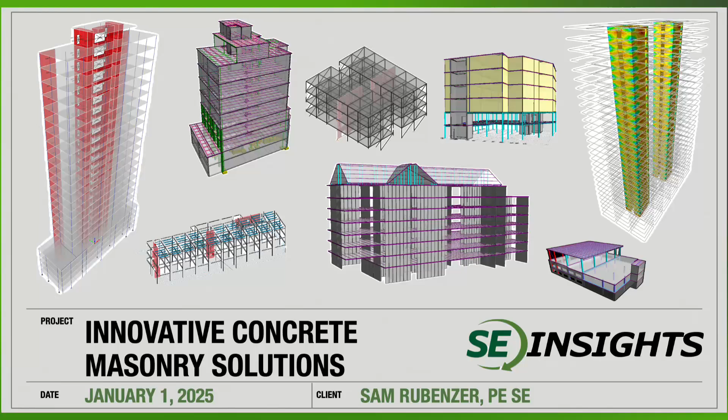Hello. In this session, we're going to discuss some innovative concrete masonry solutions.

My name is Sam Rubenzer. I'm the founder of FORSE Consulting and the managing director. I'm a licensed structural engineer in the state of Illinois and a professional engineer in a lot of Midwestern states. I have my engineering degree from the University of Minnesota and an MBA from Marquette University. Here at FORSE, we're a team of engineers with a lot of different masonry design experiences through delegated design, direct design, and we've been consultants to the masonry industry for the last 15 years.

Talking about innovation, I think it's always really important to consider a quote like this. Learning and innovation go hand in hand. The arrogance of success is to think that what you did yesterday will be sufficient for tomorrow. So certainly everything that we're talking about today in terms of innovation, things that we are doing for masonry design, we need to keep moving, we need to keep progressing, certainly in masonry and all other areas of structural design as well. So this is just one step. Here in 2025, we're looking at some ways to be innovative with concrete masonry.

So some of the things that we're going to look at, prefabrication is certainly going to be very much a part of our discussion today, how you can prefabricate masonry to achieve some pretty challenging constructability issues, whether it be site issues or time frame issues or building on site versus building in a controlled environment. So prefabricating masonry either on or off site and how that can impact delivery.

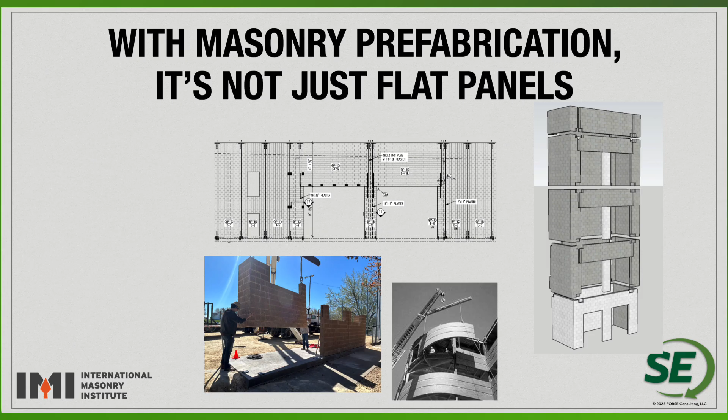And a lot of this prefabrication goes back to the image below, an actual exterior application, a prefabricated veneer panel that was built in the 80s and 90s. Vet-O-Vitz was a company that was around for quite a while doing some exterior masonry panels, but then shaft walls also, a complete four-sided shaft wall that we can also prefabricate.

So why do prefabrication? Obviously, prefabricated work can be protected from changeable weather conditions. Again, when we look at protection, that could be a tent on site, or it could be a warehouse type facility where we're doing some of the prefabricated masonry elements. So controlling weather conditions to make sure that you can always build with masonry is certainly really, really important.

Consider design features that might be too costly or labor intensive on site can be carried out in a factory. We have prefabricated elements that we're considering doing post-tensioning for. So post-tensioning might be a little bit different for the masonry industry, but it's something we're seeing implemented more and more, something that can be done in a factory setting. So you could do prefabricated masonry lintels or prefabricated elements and post-tensioned or pre-tensioned elements, depending on the different construction techniques.

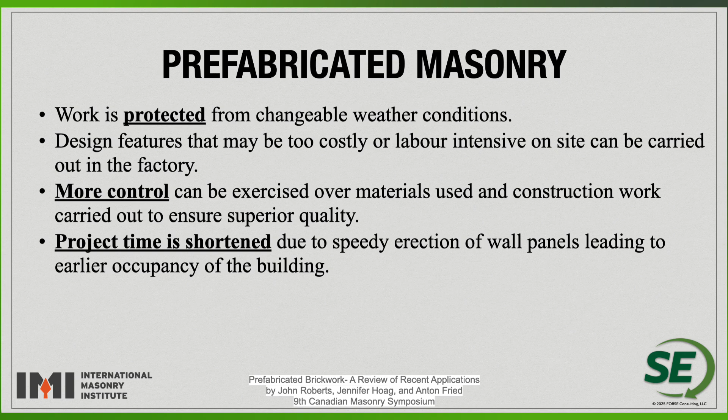More control can be exercised over materials and construction work to ensure a superior quality. You can really put it into a production style, having crews move to different stations within the controlled environment, again, a warehouse facility or something like that. And then the on-site time can certainly be shortened. So there's some huge cost savings when we can save on the overall construction time, and time on site is certainly very valuable. So a lot of the same reasons for prefabricating other materials are the same reasons we're going to consider for prefabricating concrete masonry elements.

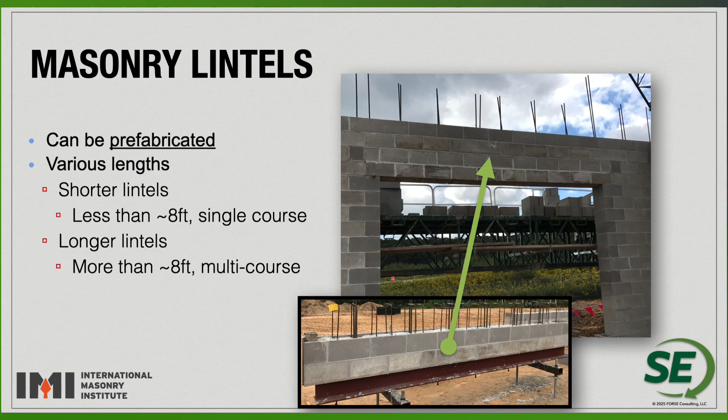So prefabricated masonry lintels, that's probably a really simple, easy place to start for prefabrication of masonry. Looking at some of the simple elements that you can construct, defining the area above an opening, a lintel element. You can prefabricate a portion of the lintel if you have enough reinforcement to shear connect additional courses to the design. But doing single course or multi-course lintels, just a quick guide, something around 8 feet we probably could do with single course. Longer lintels, maybe it's going to be multi-course prefabricated elements.

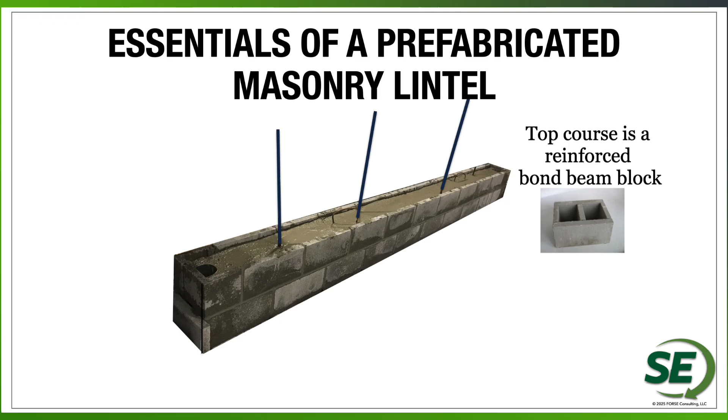Looking at some of the different components for a prefabricated masonry lintel, you're going to have the different types of block. We're going to have a bond beam block that maybe is going to be used at the top, or second course. You're going to have lintel blocks at the bottom. We're going to have vertical reinforcement that ties into the wall above. Now, sometimes we don't necessarily need to have the bars sticking out. Sometimes we can use a form saver dowel, something that the vertical reinforcement can be screwed into once we get on site. We have a lifting mechanism. Here's a lifting loop that goes around some of the reinforcement in the lintel.

And then lastly, here we have a void at the end. Depending on where the jamb reinforcement would be, putting the void at the end cell, or maybe even 12 or 16 inches in from the end, allows that jamb reinforcement to come up through the lintel so the built masonry conditions are still the same as if you would have built it on site. So having a very nice integral system, even with the prefabricated element.

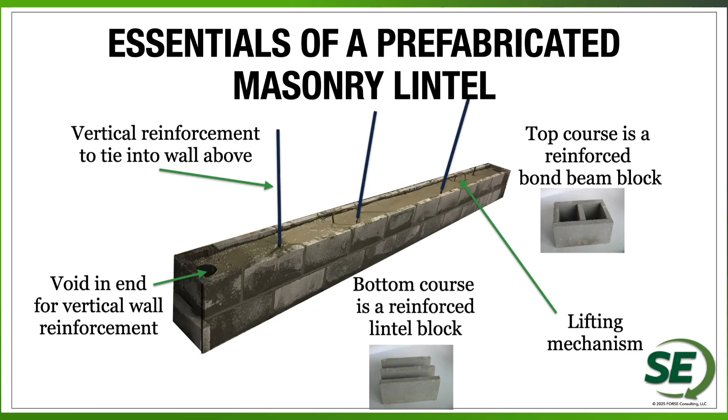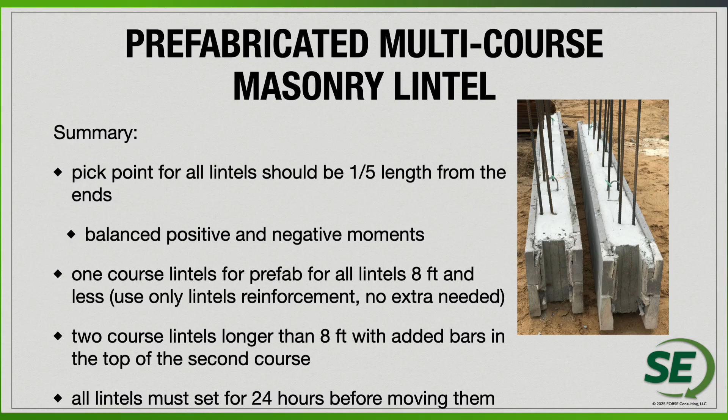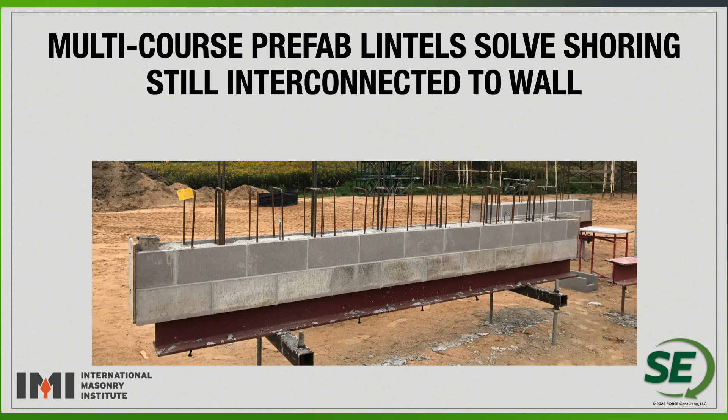But here you can see a project where I think there were over 70 prefabricated masonry lintels built on site. And then all of these were flown and set in place, all of it led by the contractor. The contractor was interested in saving time on site and ease of construction on scaffolding by just coming in and setting these things in place. A similar contractor had another project where they actually built a whole series of lintels.

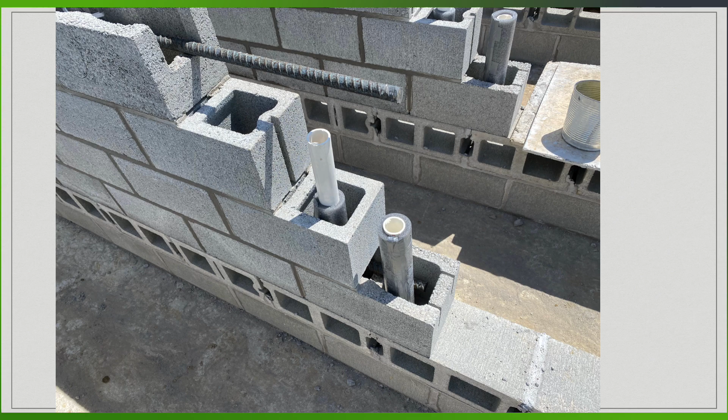Here they actually built the construction pad and used some other masonry materials to create a station system, so they could build many different prefabricated masonry lintels all at the same time. Here you can see some horizontal reinforcement at the top, but also some of the spaces and voids being incorporated into the end cells of the lintel for the jamb reinforcement to come through.

Next, we're going to take a look at prefabricated walls, prefabricated masonry wall elements.

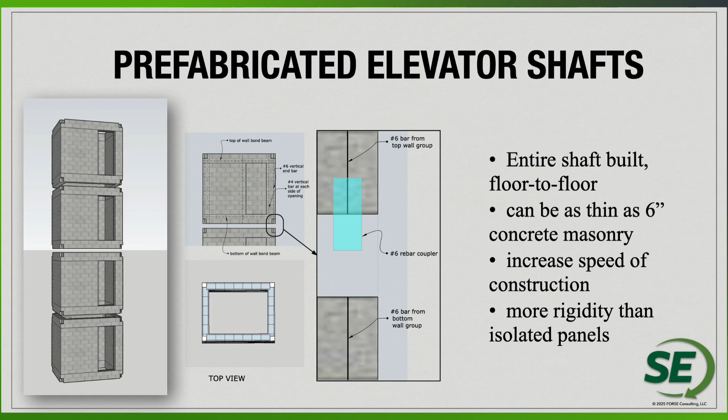There's a lot of different things that we can do with prefabricated masonry walls. There's a lot of different ways that they've been built, depending on the contractor, depending on the site and the conditions. Here you can see shaft walls that we considered and designed. We actually built in the ends, the corners of these shafts to have a reinforcement exposed with a coupler that was used to tie the reinforcement from one shaft wall to another.

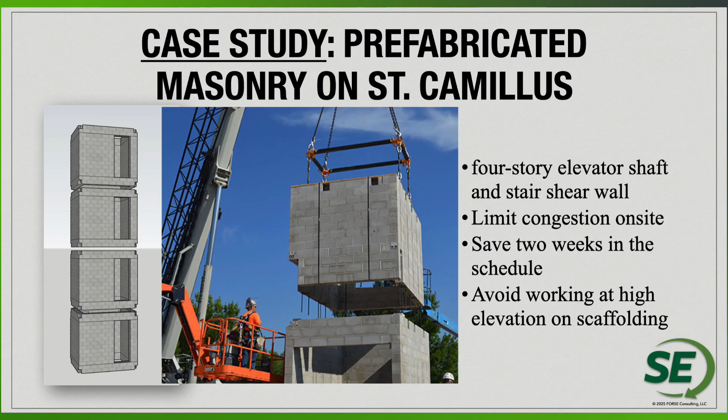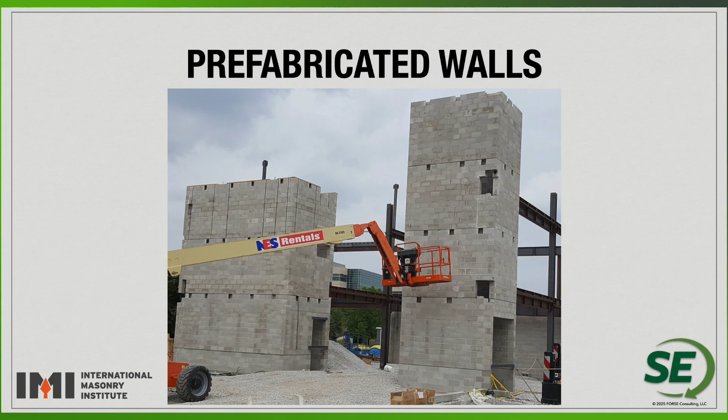So here you can kind of see that built on site and set on site for these shaft walls. You can see you also have openings at the ends of the walls. In this image, you can see some actual support locations for some of the load-bearing beams that are going to be sitting on these shaft walls. So they're load-bearing masonry elements that are prefabricated. So we have a lot of coordination that we had to consider and develop and build into the prefabrication of these elements.

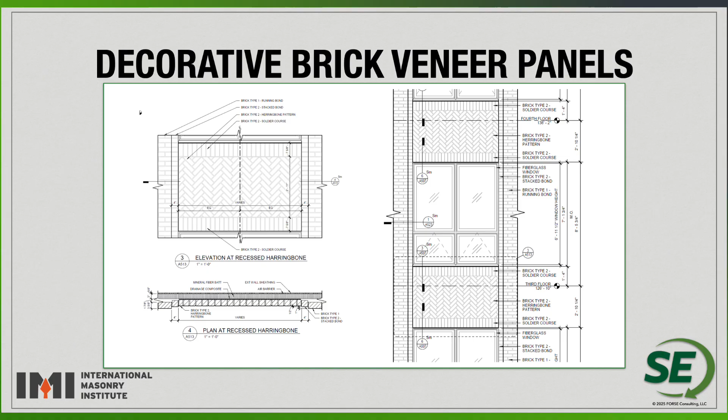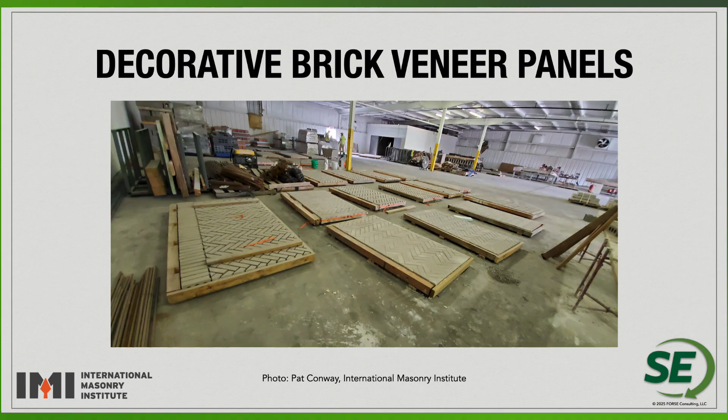You also have panels, veneer panels that you can build prefabricated. Here's an example of some brick ones, but you can certainly do this very same thing with concrete brick. So we can build these panels. You can build a whole system of these panels so that these panels can be built and set into place. A herringbone pattern might be something a little bit difficult to build on site. So you can build these elements in a shop environment, again, with a molding, setting the mortar, and then actually erecting them and maybe doing some field applied mortar as well.

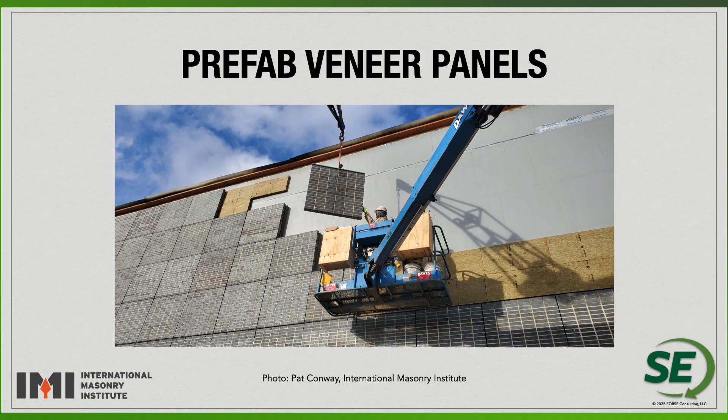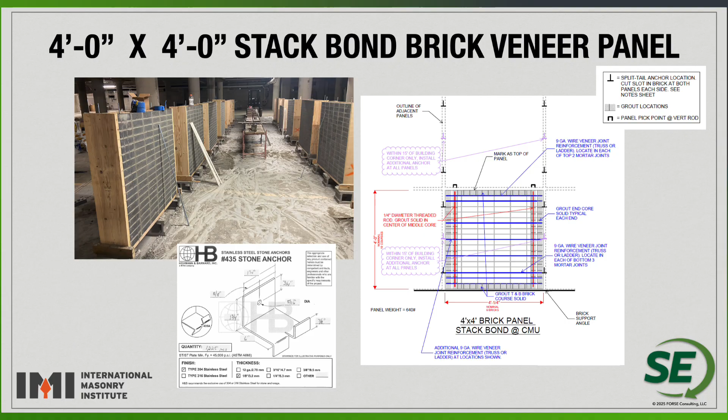So here you can see those elements. You can see more veneer panels that are being lifted and set on site. You can see there's different types of reinforcement that we can utilize, again, depending on the different types of conditions that you have for the elements actually lifting and setting some of these panels. We maybe have different types of reinforcement conditions depending on the size and location of where these panels might be set. So prefab veneer panels are certainly going to be important elements to consider.

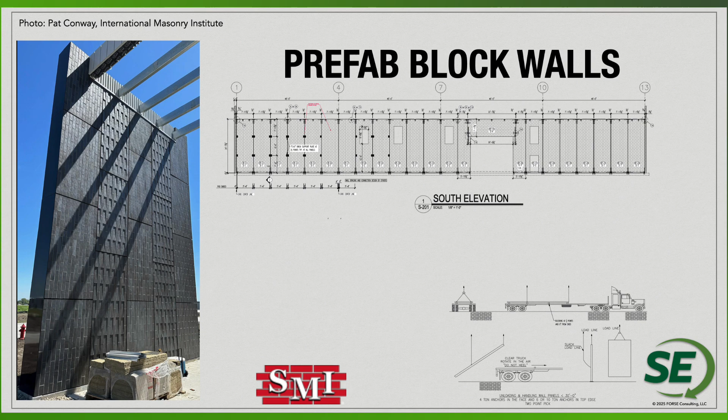Those prefab veneer panels can also be set on entire prefab block walls. So this is a project that we did for a company in Iowa, Seedorf Masonry, built these panels and set all of these concrete masonry panels for the entire building, the entire warehouse portion of the building, I should say, and then actually prefabricated the veneer panels to hang off the side of the concrete masonry block panels that were behind it. So again, prefabricated masonry was utilized in this project.

The time on site was really condensed by the fact of all the panels being pre-built actually an hour away. So they were shipped about 50 or 60 miles for this project. So they were built off-site, set in a field, and really set on trailer beds and then shipped down to the facility where they were erected here on site. So again, you could see some of the panel lines, so you could see how some of the different elements were erected and set in place.

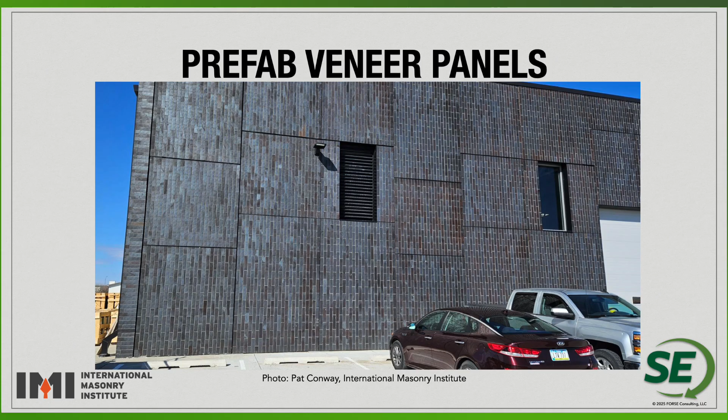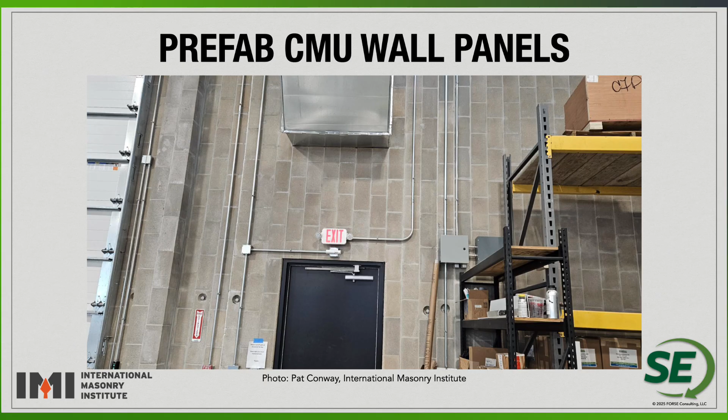You can actually see a little bit unique panels, bond patterns. You can see running bond running vertically for these panels, kind of a unique application that the facility wanted to show off. You actually see from the inside the concrete masonry block panels were also built with running bond going vertical. So the panels were actually built horizontally, reinforced in the horizontal setting, and then rotated, set on trailer beds, and then lifted and set here in place. So again, you could see here two different panels, one that was prefabricated on the right with the running bond going vertical, and then the site set panels on the left where you can see the running bond going horizontally.

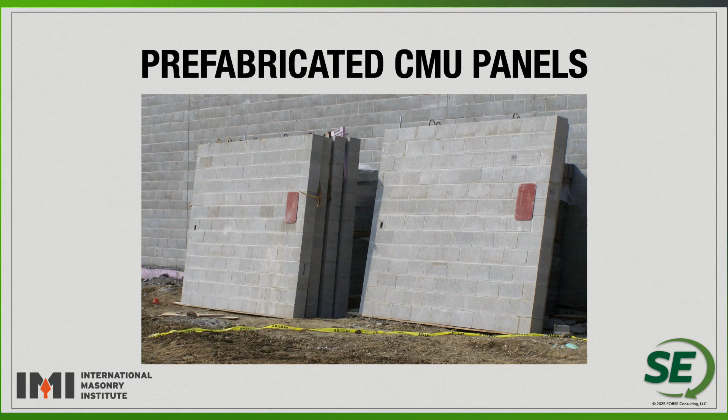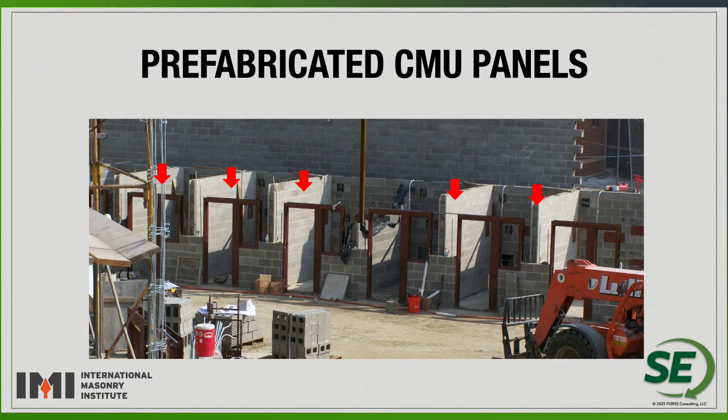So again, a lot of different options for prefabricating these masonry panels. Sometimes you just have a lot of repetitive panels. These are prefabricated concrete masonry panels that were used for a correctional facility. So again, it wasn't really so much about a very difficult design. This is just a very repetitive design, something that they could prefabricate a whole bunch of. So again, they could speed up the time on site for the construction of these cell areas.

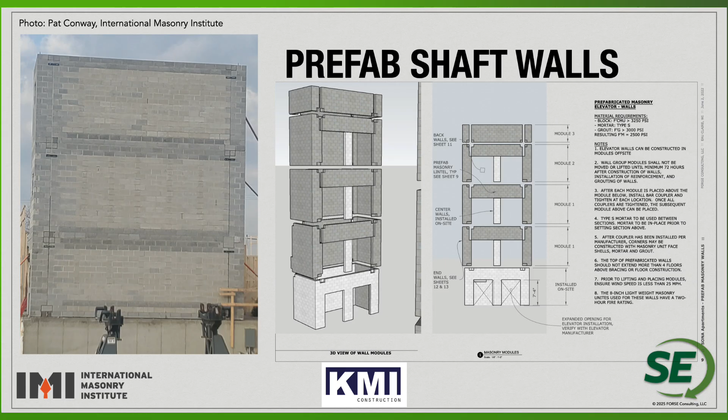You can see in the images on screen, all of the gray elements are going to be the ones that are prefabricated. All of the white elements were actually built on site, just due to different conditions of the prefabrication. We wanted to build everything above grade, so everything in the basement and the white was built on site. Once we got the precast planks set, we could go with the precast floors and then the prefabricated shaft walls above.

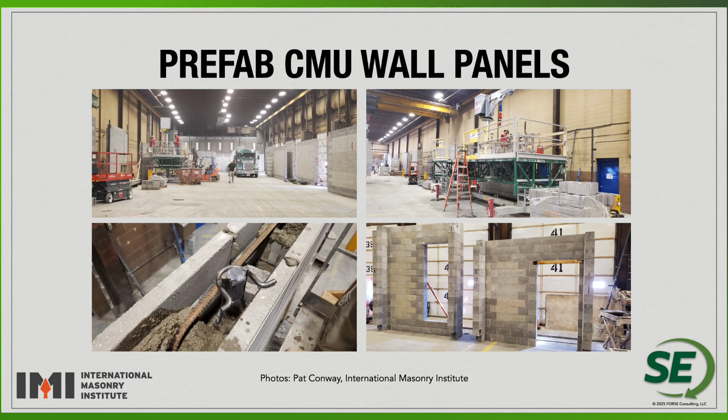So you can see a few different images here of them actually constructing them in a warehouse facility. All the different reinforcement connectors that are being used for these prefabricated elements. More shaft walls being lifted and set in place. You can see the corners.

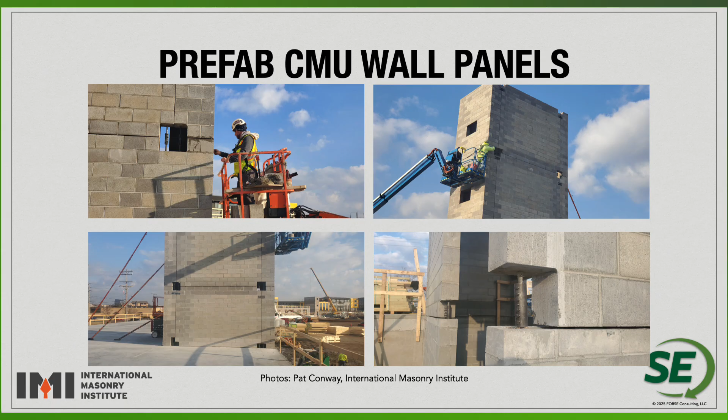If you look really close at the image on the upper left, you can see actually one of the couplers being used to splice the reinforcement from one panel down to the panel below. And a few images a little bit further away from the shaft walls. Quick thank you out to Pat Conway for some great images here for these panels built, again, on site.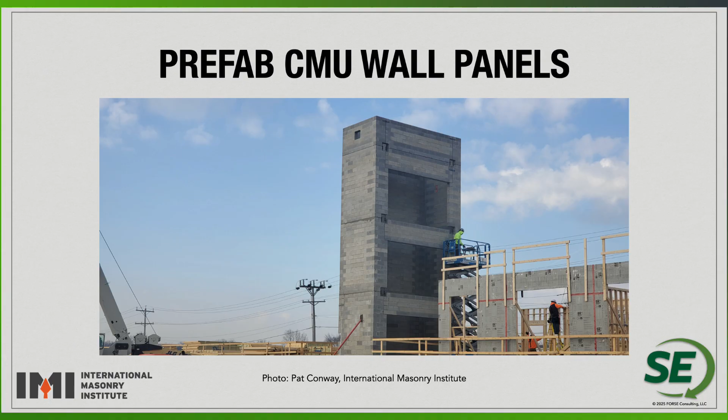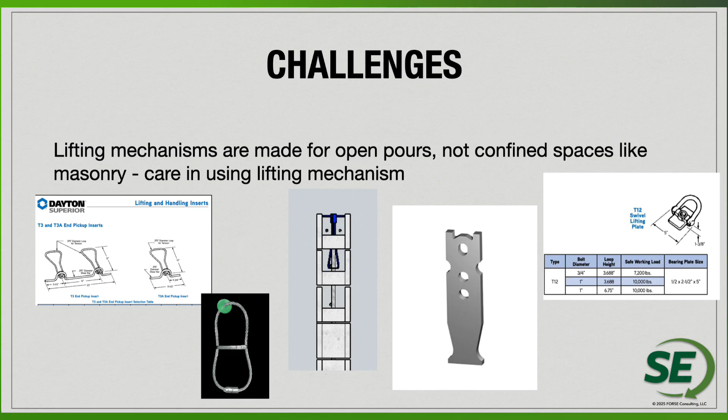So some of the challenges with prefabricated masonry: using some of the different lifting mechanisms, we had to make some modifications, for a lot of these mechanisms are built for and designed for precast concrete elements. So again, it's a little bit different challenges when you have setting these connecting mechanisms within a confined cell. So we had to overcome some of those challenges when we wanted to develop some of the different connection points for these different prefabricated masonry items.

Some of the key points for masonry fabrication, obviously the essentials of masonry. We have to make sure that we understand the capacity of masonry, making sure that we understand the purposes to simplify and speed up. We don't want to reduce the overall capacity. When we prefabricate, we certainly want to build in plenty of strength in the overall design. We have a lot of different avenues for prefabrication. We can do entire shaft walls, we can do wall panels, and we can do lintels, or we can do some combination of all of the above.

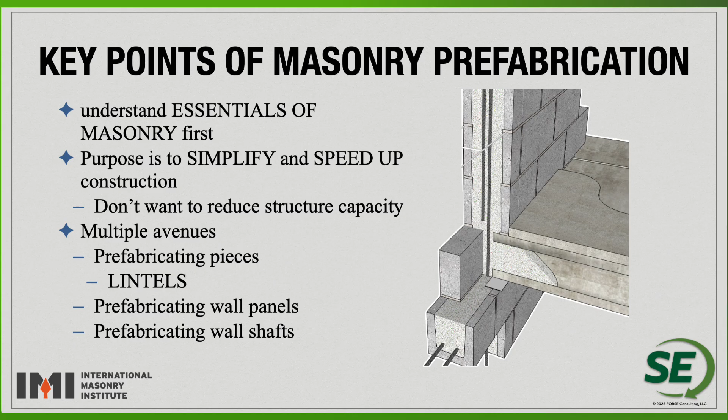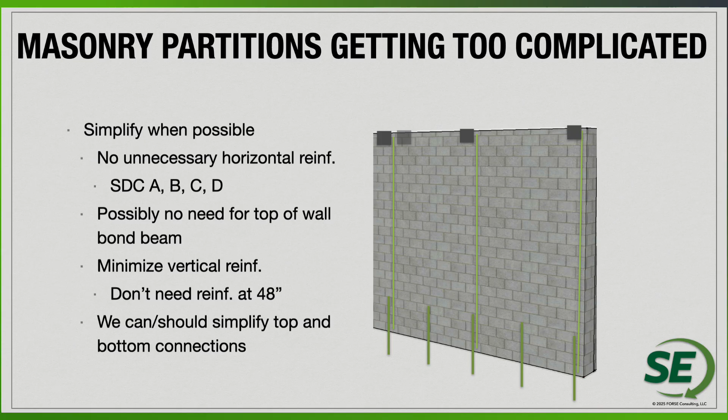Next section here, we're going to look really quick at some of the other innovations. Again, the partition walls, really the simplification of them is what I'm going to call the innovation, pulling out some of the reinforcement, simplifying some of the connections for these walls to try to, again, bring down the cost, bring down the elements that you need in place, considering thinner walls or unreinforced and ungrouted partition walls to save a lot of materials in design.

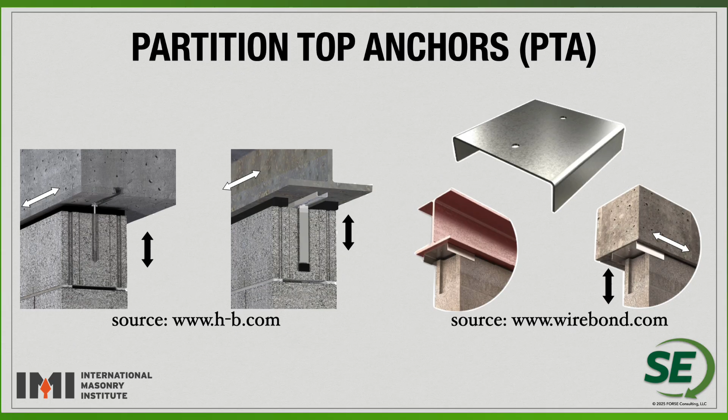Some of the different top of wall anchors, these are relatively new. We see people using these in a mixed kind of capacity. Sometimes we are able to design some of these for different mason contractors. Sometimes engineers like to use something that's much more expensive and a lot more elaborate at the top. But again, partition walls, we have really light loads. We really just need to consider the minimal connections that you need at the top and at the base to keep these elements efficient. So that goes for the interior walls, but also exterior walls.

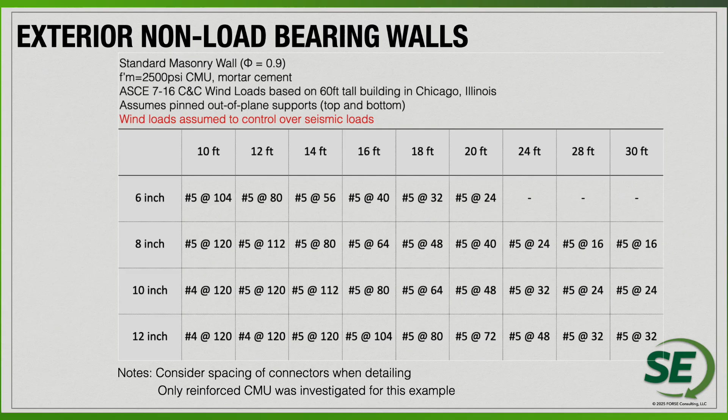Again, if we can pull out some of the reinforcement, we can simplify some of the connections. We really can save a lot for some of these exterior non-load bearing walls. So sometimes these are used obviously for architectural reasons, but having a chart like this so that you can reinforce them in a minimal fashion, and then consider some of the similar connections at the top.

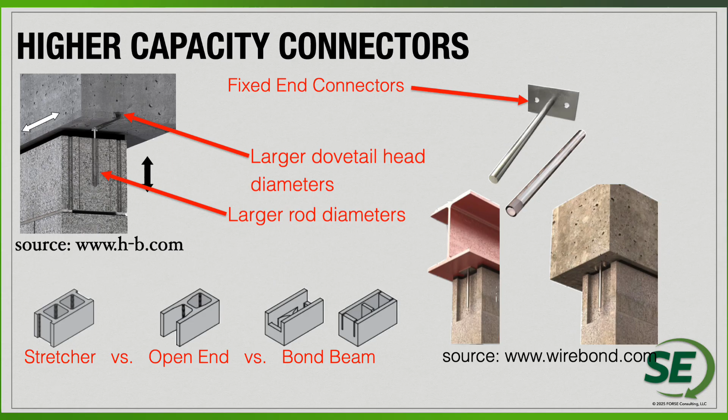Again, we're getting some requests for doing similar types of connections at the exterior walls. And again, they're going to have higher load demand. So we're going to have larger rod diameters, larger connectors, larger plates that are going to need to be used. But again, a lot of this information we can put into a little guide for partition walls. And then we have also one for exterior walls that people can download.

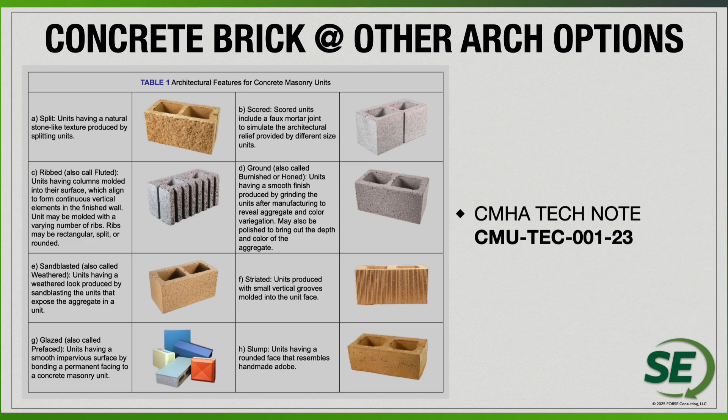Now, doing that on a full unit or looking at a concrete brick. So concrete brick is really going to give us options for doing concrete elements from 4 inches to 12 inches wide. The 4-inch element could be unreinforced, kind of in a cavity wall construction. But once you go to 6, 8, 10s, and 12s, obviously we can do reinforcement.

So you can have concrete brick in a single width wall application, but we also could use concrete brick in a cavity wall, especially again if it's 4-inch. A 4-inch concrete brick utilized in a cavity wall could be used very similar to the clay option.

You also have a composite wall, which is essentially you could have 2 reinforced walls that would be connected by a collar joint. And so a composite wall would really be just kind of an overall thicker wall by having a concrete brick option and a concrete backup wall.

Composite walls are not used when you have clay and concrete, but if you have concrete and concrete, certainly looking at a composite wall could use a thicker wall construction. You could use more aesthetic options on the outside and something different on the inside. But composite wall is going to end up being kind of something like the single width wall.

You also have a diaphragm wall. Diaphragm wall would be kind of 2 separate wythes that are built with some space in between. The diaphragm wall, the purpose of it would be to go kind of super tall with your design. You can connect the 2 wythes with what we would call diaphragm walls, connecting them together so the internal wythe and the external wythe would actually work together for the out of plane kind of bending capacity.

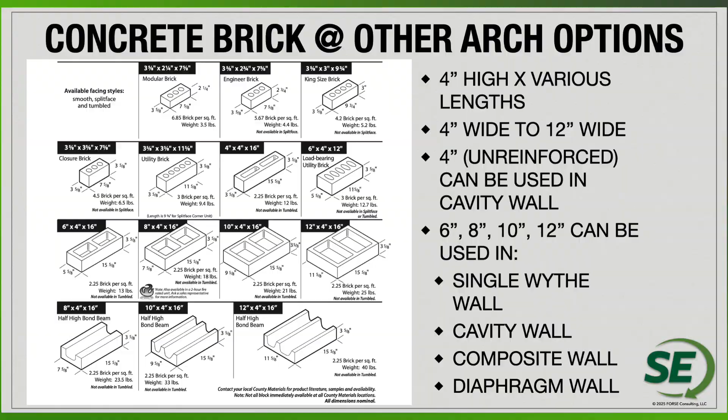So it's a really creative, great way to get a lot more capacity. But again, using concrete brick that can be reinforced on the outside and inside certainly gives you a lot more options. And again, anytime that we're going to do any conversations about prefabrication of a concrete brick application, we're going to have to use at least a 6-inch thick concrete brick to actually get to a design that can be reinforced so that we can lift and set into place.

All right, some other innovations beyond the concrete brick. If we looked at 32-inch block, Insultech, high R CMU, these are going to just be new products that are going to be available for use in concrete masonry design. So the first one I'm going to look at here is post-tension masonry. This is actually codified. It's not so much of a new idea. It's been around for quite a while.

It's been used in different parts of the country and a variety of different types of construction in full building designs. So post-tensioning, there's going to be some necessary products for anchorage at the top and bottom. So it's a little bit different construction when we look at the typical masonry wall design construction, but certainly there's a lot of potential with post-tensioned concrete masonry.

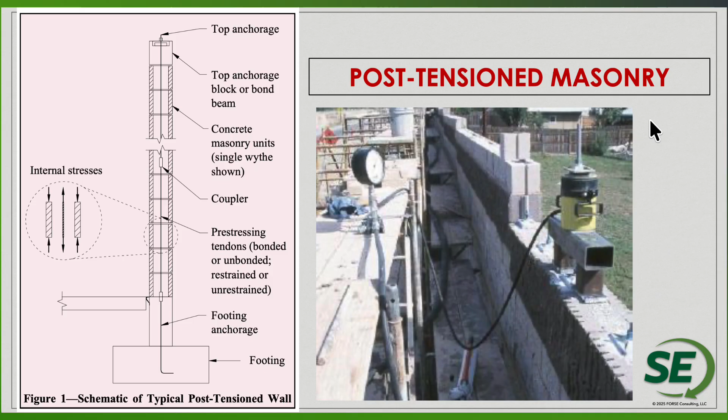So if we consider the prefabrication, I think there's a lot of opportunities there, but even the site-built post-tension masonry, just again, considering some new materials for anchorage at the top and the bottom, most of the other materials in between could certainly be your typical masonry units.

32-inch long CMU, this is going to be a product that's available here in the Midwest. Again, utilizing large blocks like this, very similar to prefabrication. It's giving us large units that we can set relatively quickly. The purpose of them is the speed of construction. Certainly when we get to certain size units, they're going to get pretty heavy, so doubling the size of them is going to be more than maybe one person can safely lift on site.

So we're going to have to get to some unique construction techniques, so we're going to talk about that a little bit as well, but definitely consider, and maybe you don't necessarily have to specify anything different as a designer, but definitely recognize that this is going to be a great option for the overall construction of a concrete masonry wall.

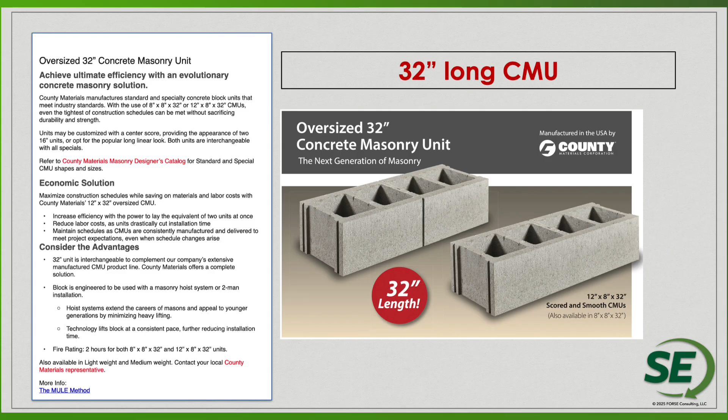Insultech is going to be another product that's offered from a certain manufacturer in the Midwest. As you can see here, it's an actual concrete masonry system that's got integrated insulation and water barriers, and an exterior wythe that can be concrete, could be clay, could be a variety of materials. So Insultech is going to be another proprietary system that gives us a lot of different options and opportunities for an aesthetic, but kind of a cavity wall type of construction that you can incorporate into your designs.

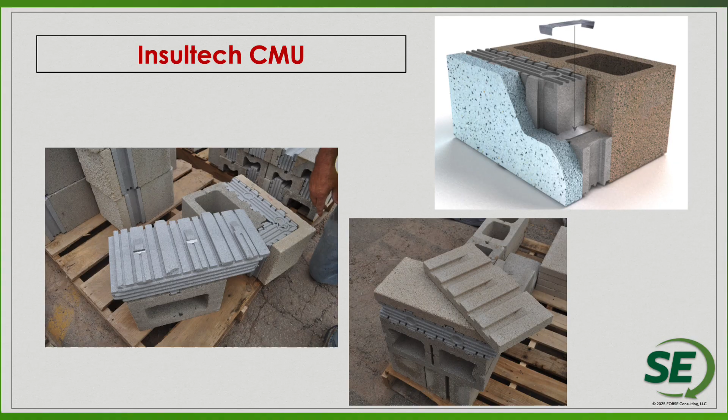So here's a couple different images for Insultech. So you're going to see it's a pretty standard concrete masonry unit that's going to be in the backside. Really, it's going to be a high strength concrete masonry unit. So oftentimes the f'm when we're using Insultech is going to be able to be an f'm of 3000. So certainly that can be advantageous for different types of designs, for making sure you utilize that full capacity.

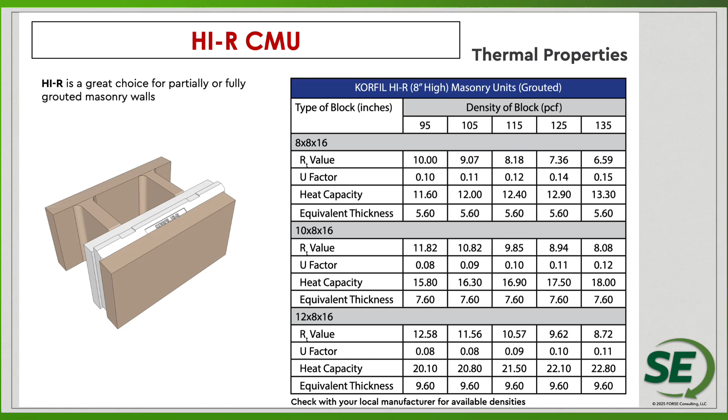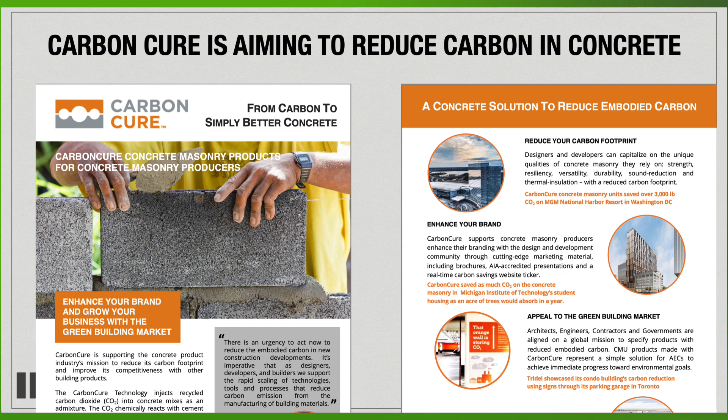There's other materials that we're also seeing being utilized more and more in concrete masonry. CarbonCure is aiming to reduce the amount of carbon in concrete. So doing that in a concrete masonry solution is certainly going to be a very unique application for lowering the carbon footprint for design. So there's several different companies that are looking at reducing and creating low carbon concrete masonry units.

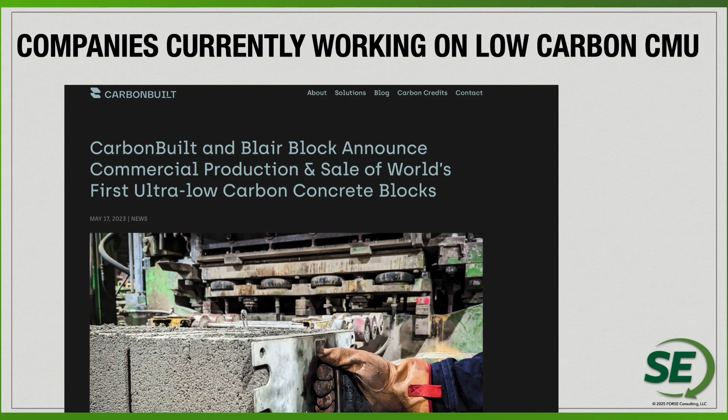Next section, again, masonry foundations. Again, this might not seem like an innovation. This might seem like a little bit of a blast from the past, but I think that it's worthwhile bringing up again, because with some unique perspectives on masonry foundations and understanding the actual capacity of masonry, really it comes down to good design, good details, and reliable construction. Once all of that is in place, we know that we can use concrete masonry in a foundation wall.

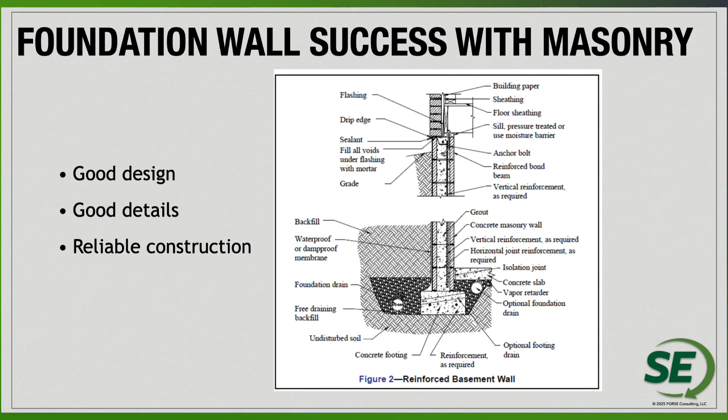And really, I think this is a good topic to bring up right after looking at some of the low carbon alternatives for masonry. If we're looking to increase the sustainability or reduce the carbon footprint, I think there's no better way to do that for a project than to use a partially grouted concrete masonry foundation wall solution. So there's a variety of different basement walls or stem walls. All of them can be partially grouted and reinforced. But again, good design, good details, reliable construction make this a possibility.

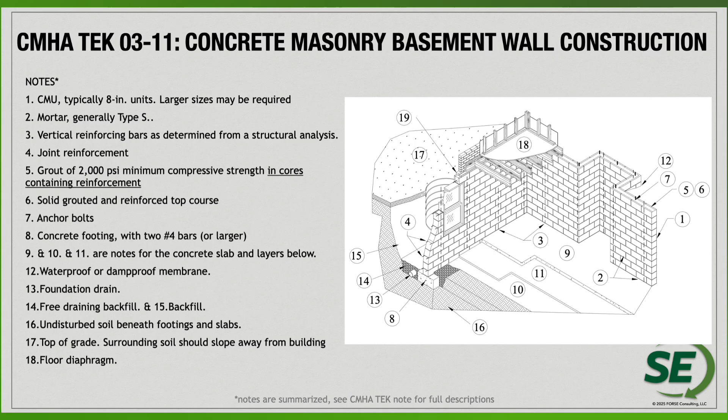There's some really nice guides from CMHA to look at all the different elements that need to be in place. But there's no reason why concrete masonry can't be a very good part of the building solution. But again, a lot less material. In fact, I even say you're not really that serious about lowering your carbon footprint if you haven't built with partially grouted concrete masonry foundations.

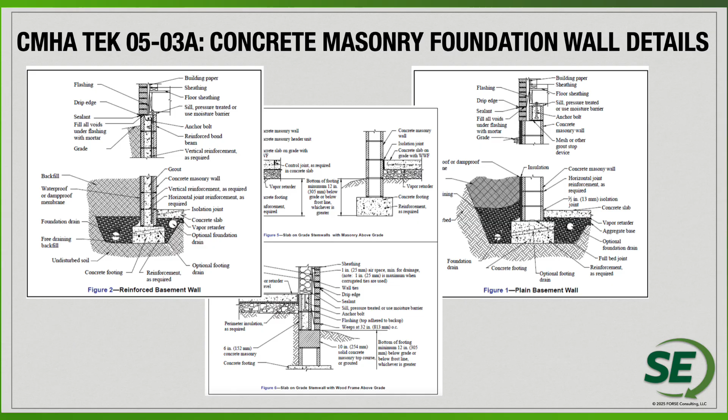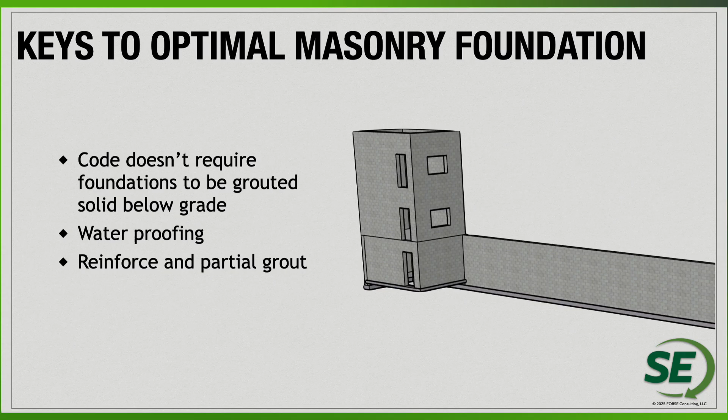So again, a lot of different notes, not so much about masonry, but really about proper site conditions, proper ways to get water away from the site to make sure that you have a site that has good drainage, and getting the water away to make sure that doesn't cause any high load situations. There's a lot of different details available here from another CMHA TEK guide. Really, the key is getting the water away. So having a proper site, having waterproofing, having insulation in the right spot can certainly lead to a very successful masonry foundation design.

Next, we're going to switch over to some of the different innovations in terms of construction. The first one that I'm going to look at is the mule, because a lot of times with masonry foundations, one of the limitations is the fact that the blocks get just too large. If you had an 8-inch wall above and then 2-inch insulation, 2-inch airspace, and a 4-inch veneer, that's a 16-inch wall, and a 16-inch foundation block is relatively thick. So recognize that that's a pretty large, pretty heavy system. Whether we were talking about the 32-inch long blocks that I just talked about as an innovative material, just a 16 by 16 is also going to be pretty heavy.

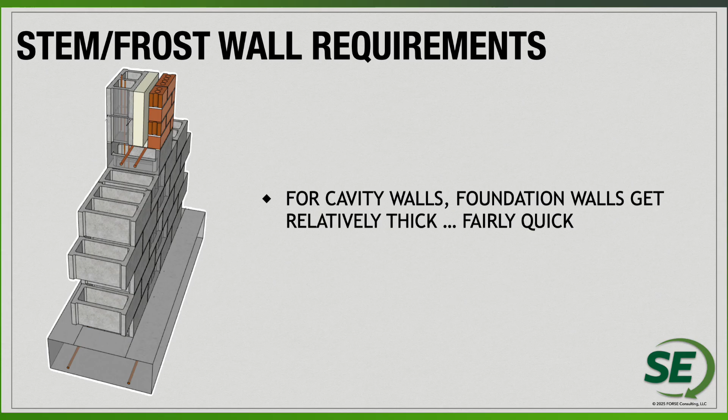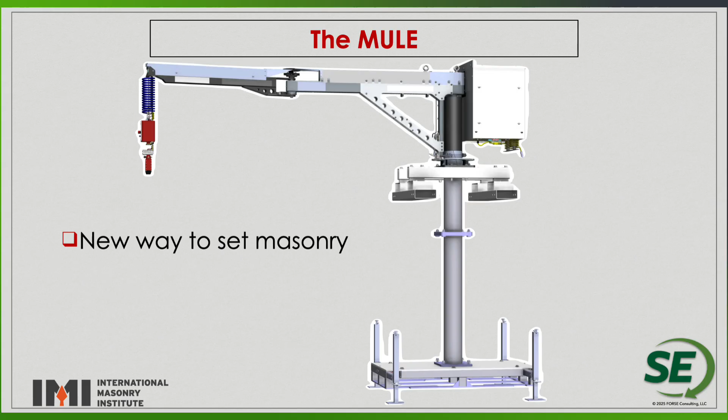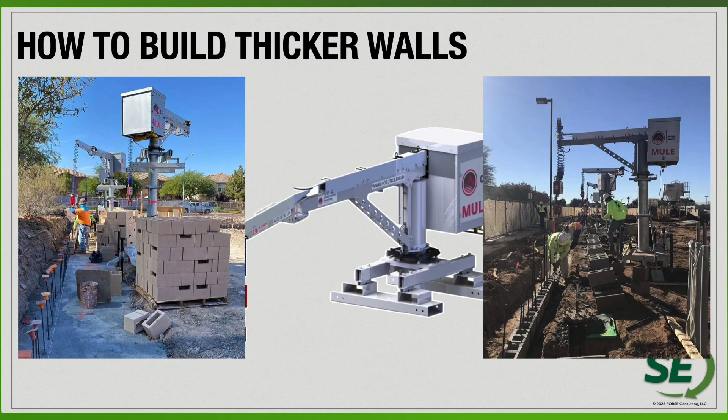So we see more and more of these systems called mules that are actually used to aid in the setting of concrete masonry systems. It's basically a big robotic arm that can do all the lifting for you. You can lift and set them into place. You can have a whole series of these. As you can see on this site, they have a series of mules that are used to set larger, thicker units quickly. So in terms of building thicker walls, utilizing mules to lift some of these very heavy elements is going to be very key to developing the design.

Another part of building thicker walls is that you could certainly prefabricate them. With prefabrication, you're definitely going to have a crane that lifts and sets the panels into place. So whether it's 8 inches thick or 16 inches thick, we are going to have the cranes available at the construction sites to lift and set some of these larger elements as well. So whether it's a mule or a full crane, we have a lot of different ways that we can set some of these thicker concrete masonry units.

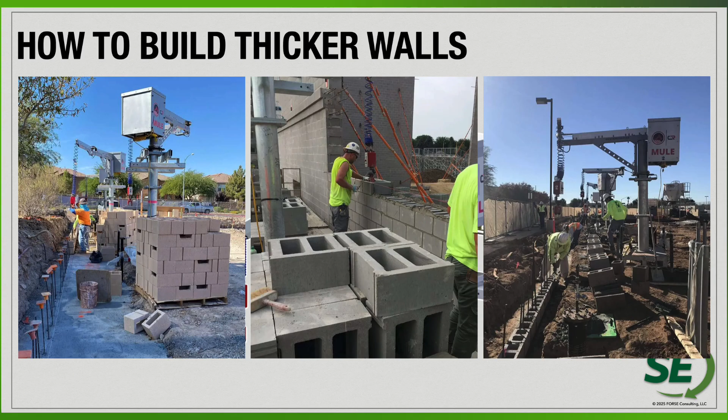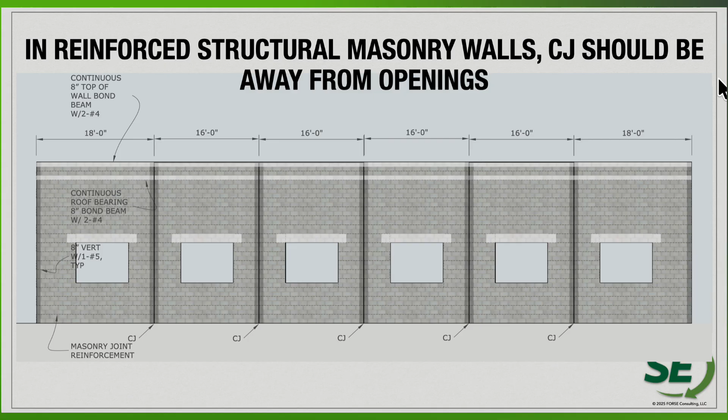Control joints, we're going to talk about control joints a little bit. There's a whole session on control joints and different things that you can do for control joints with masonry. Really kind of looking at trying to improve upon this system where we have windows that are becoming very repetitive within a construction, looking at different ways that we could actually reinforce these elements so that we don't have to have so many different control joints, breaks in the overall panel, and really reduction in capacity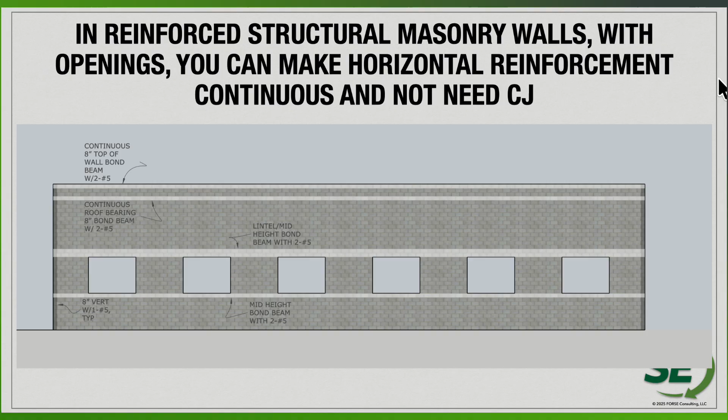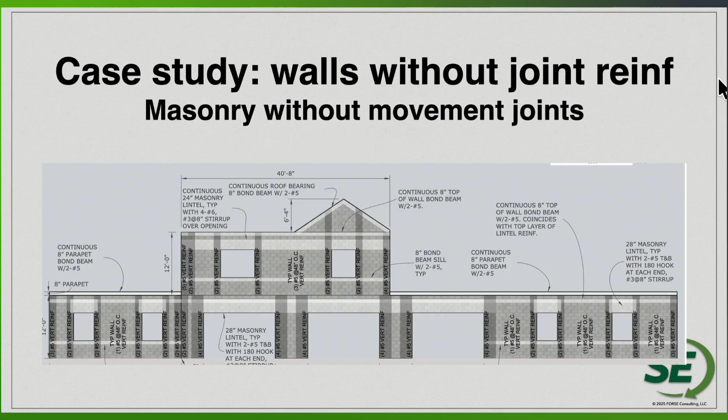with a little bit more knowledge about materials and thinking about how we can run reinforcement continuous, whether it's bond beam reinforcement for lintels or joint reinforcement or sill reinforcement. A lot of that gives us the opportunity to make continuous masonry elements. Here you can see a case study where we did this for a project with, again, multiple openings. So building a little bit differently without movement joints is definitely an innovative way to build with concrete masonry that I think is changing the way contractors are looking at some of these projects and some of the different opportunities that they can implement in their designs.

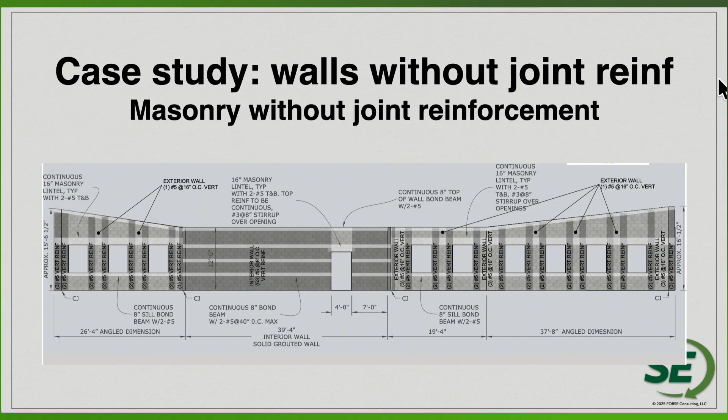Next, we want to look at precast lintels within masonry walls. So we talk a lot here at FORSE about utilizing concrete masonry lintels for masonry walls, how those masonry lintels can be an integral part of the overall wall design solution. The masonry lintels should have reinforcement that extends and crosses with jamb reinforcement that comes up the vertical side of the opening and really creates a very robust system. You're going to have a lot of integration between the lintel elements and the wall above and the lintel elements and the jamb elements of the wall. So it really does create a very robust solution.

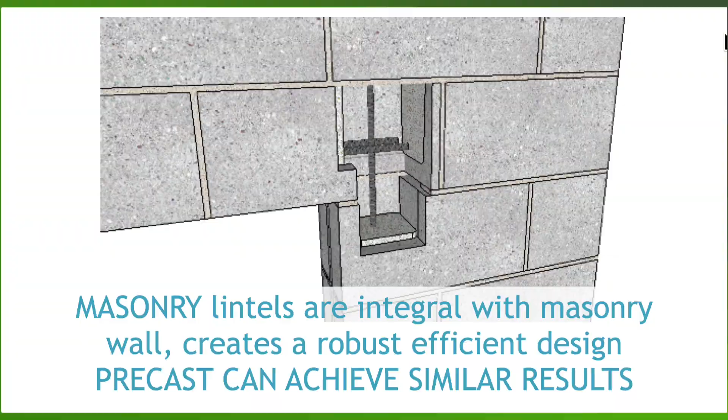So when I talk about precast that can achieve similar results, looking at precast lintels that look like these, this is one of the products that you can utilize for precast concrete that can be used within concrete masonry walls. So these would be essentially elongated concrete masonry lintel units, right? They have end relief at the end for the jamb reinforcement to still come up through. So looking at precast concrete lintels to be used within concrete masonry walls, making sure that you have the right elements selected. So this isn't a rectangular section that's going to be maybe thicker than the overall wall. It's not going to be a rectangular section that has no attempt at making an integral element with the rest of the masonry wall around it.

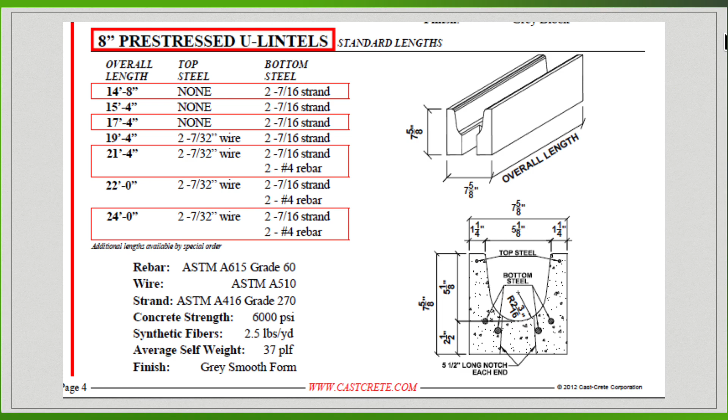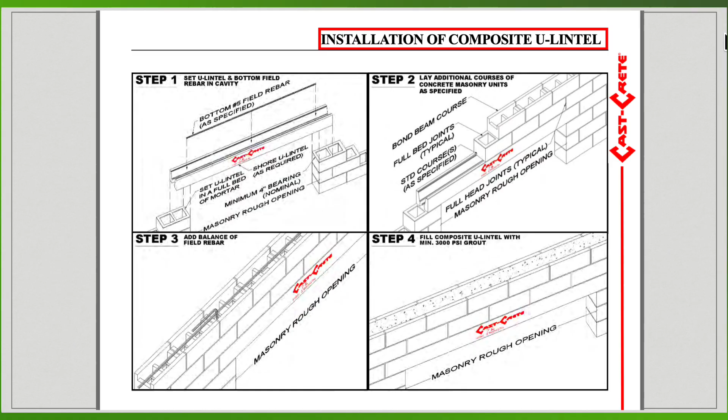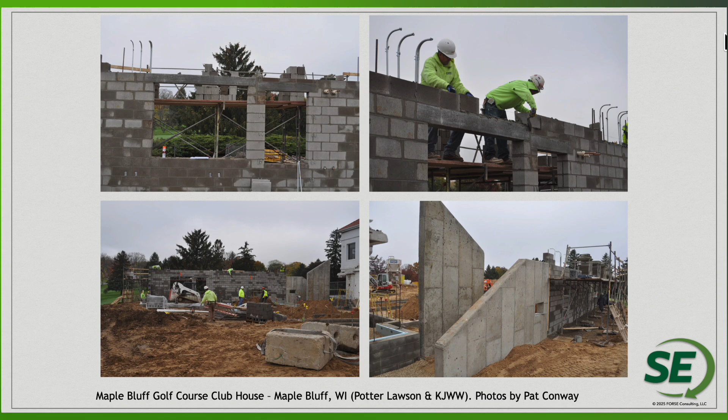These precast elements here, for example, use tendons to reinforce the concrete for being able to span the opening during construction. Then you can certainly add additional reinforcement to the unit to span the opening for the life of the structure. But really, this company makes a lot of attempts at making construction a lot easier, shoring a lot easier, by not having it even be needed at all. It's going to be another concrete element, so it integrates well with the concrete masonry that you're building around it. And in fact, here you can see a project where we utilized the precast lintel that is integral with the rest of the concrete masonry wall around it.

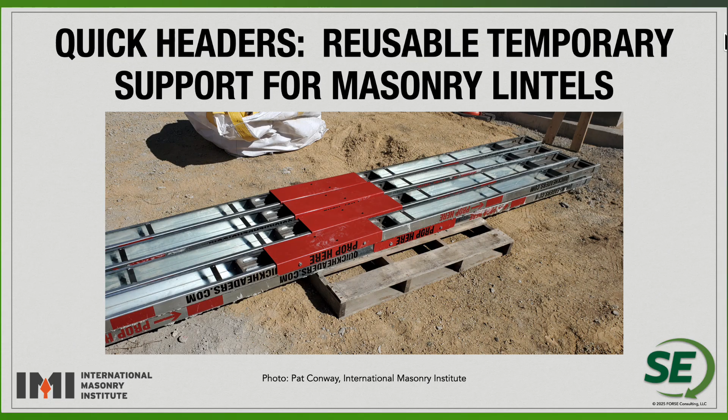Speaking of shoring and possibly eliminating shoring, there's other ways that we can resolve shoring in some very creative ways. There's new shoring companies that are coming out with different types of shoring systems so that the shores can be reused. These particular shores are going to be elements that actually get set in place. As you can see here, you can have a 3-foot version, you can have a 6-foot version. If you have 6 feet, you have an additional support that you put in the middle, kind of a post. But they're really elements that can be reused. So when you set these in place, you build your concrete masonry lintel above it, and you can build the rest of your wall and then remove the shoring.

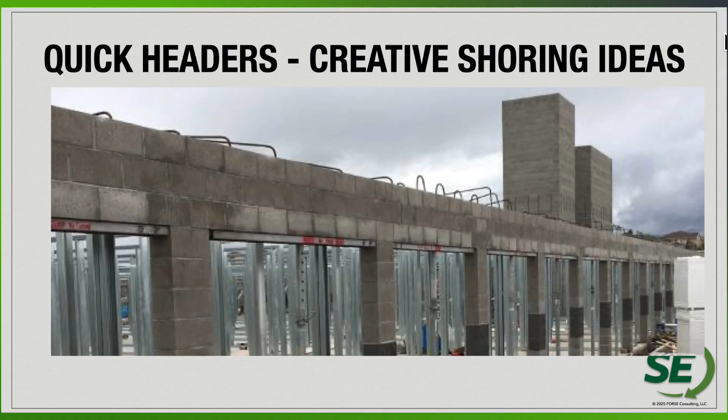So they actually have ends that project, that telescope out from the ends so that they can span the opening. But then once you have everything built, you can tap those telescoped ends into the rest of the channel and then remove the steel element. So you can see here it's utilized on a long span condition where you have many different shores that are put into place but then removed. So really we covered 3 different ways to span openings. I think shoring has been a little bit of an issue for openings in masonry walls.

We first talked about precast concrete masonry lintels. Those can certainly be prefabricated, set into place, no shoring needed. We talked about precast lintels that look like and have the same material, concrete, that are being used now within masonry construction. And then lastly here, a proprietary product, or there's other similar products that can be utilized like this,

that you could reuse steel shoring, take the system out and actually put it back into a future project to build a concrete masonry lintel around it. So a couple different options for replacing shoring or creative shoring that can be reused. Last little innovative idea. Again, this is going to be one that's been around for a little while.

Internal bracing is going to be something that we have talked about in the past, but I see a huge resurgence of it here in the last several months to a year. It's a really great creative way to take, essentially, there's a guide that was created by Mr. Scott Walkowicz. It essentially looks at bracing for masonry in a unique way.

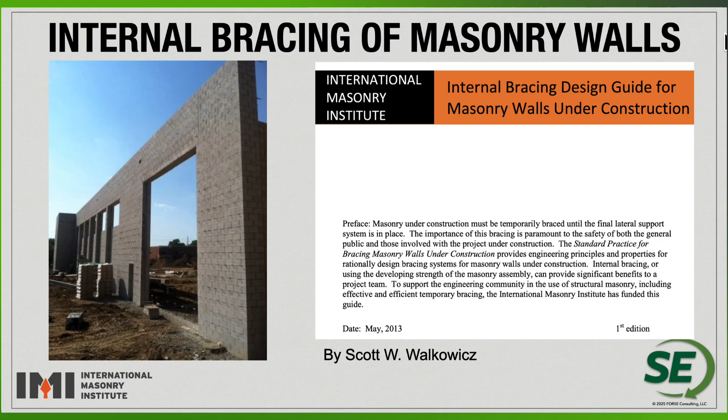Well, the internal bracing guide essentially uses the early strength of masonry to allow for the masonry element to support itself in a cantilevered condition off of the base of the design. So really one of the very critical elements is going to be a fixed base. Looking at internal bracing is having fixity at the base of the masonry wall so that the wall can essentially cantilever up and then be able to resist some of those early pressure loads.

So there's different stages. There's an initial period, an intermediate period where we recognize the capacity of masonry that you have when you are building the wall. Certainly if the wind loads get large enough, then you have to evacuate the site. But that actually is a pretty significant wind load. So it's not like just a minimal load is going to bring the wall down.

Internal bracing recognizes the early strength of masonry. It's a very creative way to build masonry walls, to not have to put external braces on the walls. It really does have a lot of benefits to the overall schedule and cost for the project. It really does clean up the site quite a bit. So it can be a really, really good creative way to do design for masonry walls.

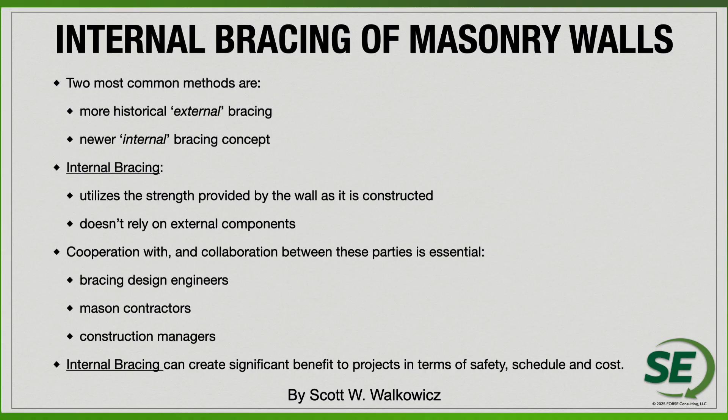So with that, we're going to go ahead and wrap up. You can see that there's a lot of different solutions, a lot of different innovations that we've covered. We have prefabricated masonry lintels. We have prefabricated masonry walls that we looked at. We looked at non-load-bearing interior masonry walls. We looked at non-load-bearing exterior walls and some of the different connections that are utilized within those.

We're talking more about masonry foundations. Again, it's really more about site conditions and overall construction techniques for those foundations. But getting into the construction techniques, the mule is giving us the ability to talk about those longer blocks or those heavier blocks or those thicker blocks for foundations. Mules are able to give us a mechanical arm to lift and set masonry in place. There can be a series of them set up on a job site. It could really speed up the overall construction.

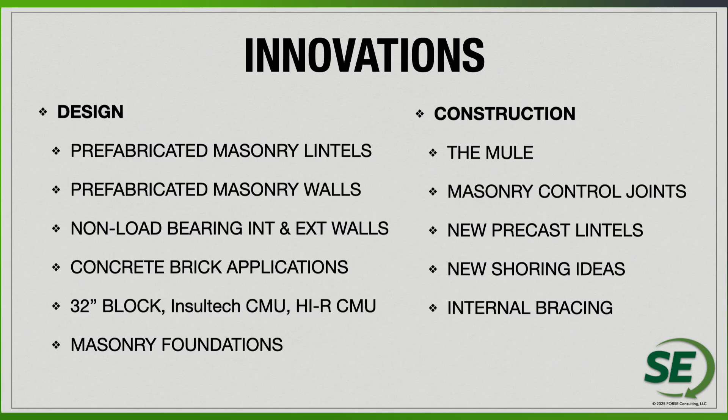We looked at precast lintels. We looked at different movement control strategies that can be utilized within masonry design. We looked at shoring. So again, prefabricated masonry lintels, precast lintels, new shoring ideas, all giving us new ideas and new ways to build openings within masonry walls. And then last but not least, an internal bracing that we can utilize to actually have built masonry with just the early strength of masonry being considered for design.